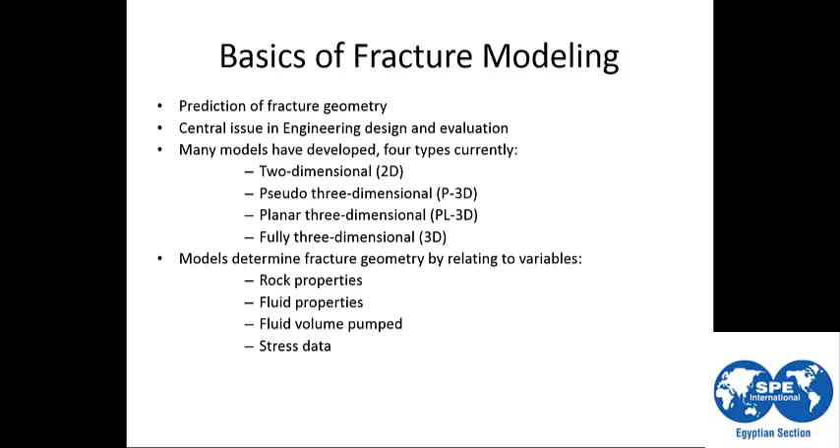First of all, we will discuss the fracturing model. 2D models assume the fracture. We have three parameters of control describing the fracture geometry: fracture width, fracture height, and fracture half length.

What do we mean by 2D model? 2D model means that you only have two parameters from the three parameters of the fracture geometry that can be changed, with the fracture half length. I mean that only one parameter cannot be changed. Here, the fracture height is constant, remaining constant, but the fracture width is changing with the fracture height.

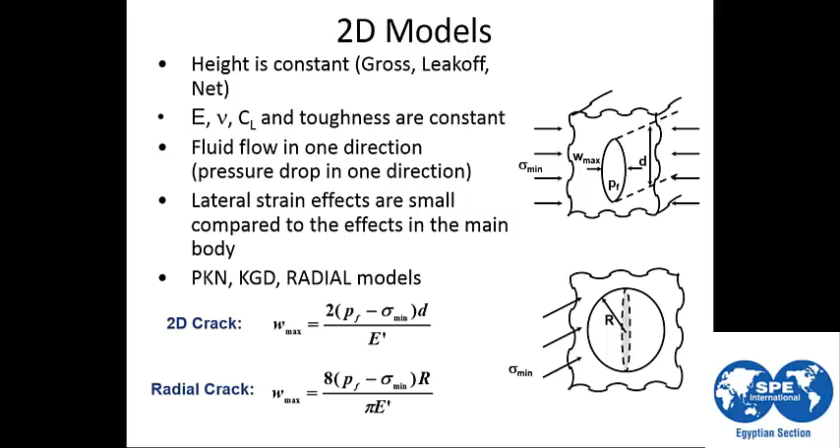Okay, so this is what we mean by the 2D models. We have in the 2D model three main types: the PKN model, KGD model, and radial model.

The PKN model, we can see from this geometry that the width is changing with the fracture height. However, the fracture height keeps constant with fracture half length.

For the KGD model, the assumption is the fracture width is kept constant, while it keeps constant with the fracture height, but it changes with the fracture half length. We can see from this shape that the fracture width is changing with the fracture length and keeps constant with the fracture height.

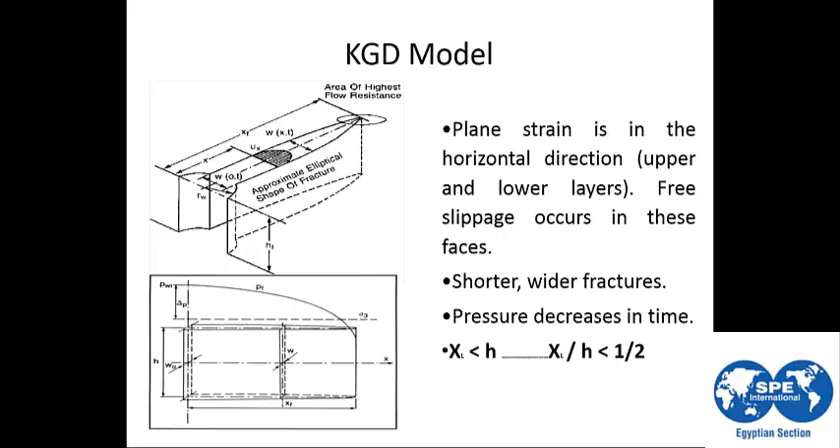For the radial model, we are assuming the model is like a sphere. The fracture width is changing with the fracture height and also with the fracture half length, but we assume the fracture half length is changing according to half sphere, like a radial in half sphere. So its fracture shape is kept constant according to this equation.

But we are not using the radial model so much. Mainly in the 2D models, we are using the PKN model or KGD.

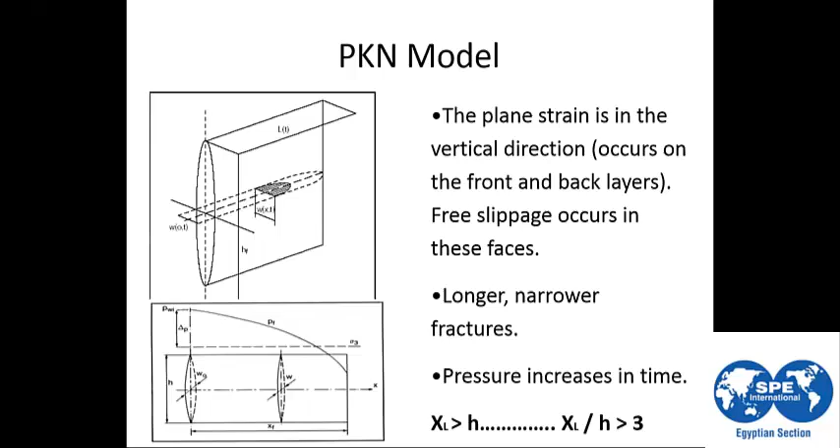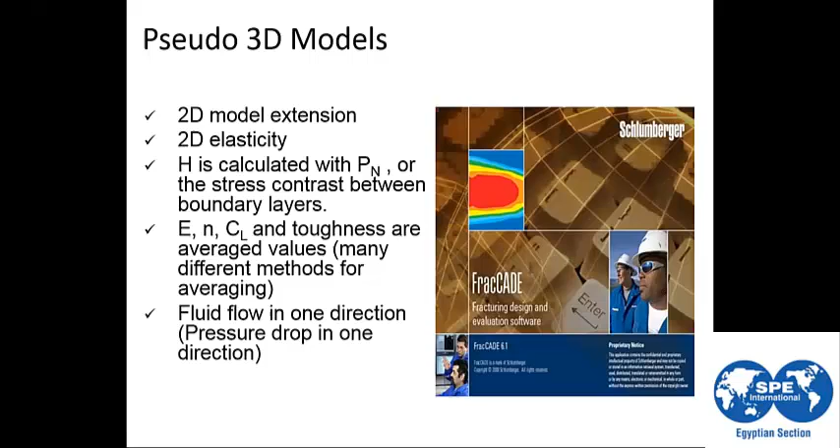However, the most used one is the pseudo 3D model that we use in most of our frac jobs. It divides the fracture into segments, and each segment has a different shape.

Here we assume that the fracture is divided into different parts. Each one of the parts has a different geometry, and this gives more reliability to the model, so it can explain the actual shape of the fracture. The P3D model is better than the 2D models.

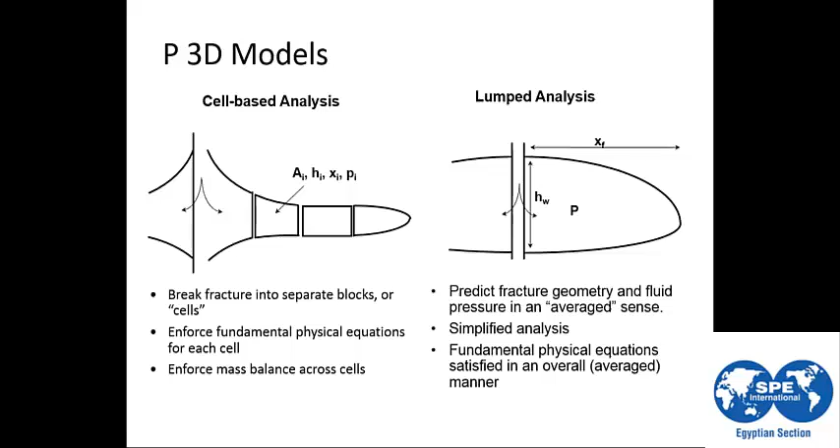However, the best one for sure is the full 3D model, which is similar to reservoir simulation. We divide the fracture itself into segments, small segments.

Each one of these segments, we can put all the parameters that we are using for the whole frac, which means that for each cube segment of the reservoir rock, we can assign its own Poisson ratio, its own Young's modulus, its own fluid leak-off coefficient, its own in-situ stress. All of these parameters can be classified into each single segment of this cube, as we can say.

So at the end, you will have fracture properties for each one of these segments. After combining the stress profile for each one, you will have different frac geometry inside each of these segments or cells. After combining the fracture results in each of these cells, you will have complete fracturing in all of them, and then you can combine these together to get the full frac geometry.

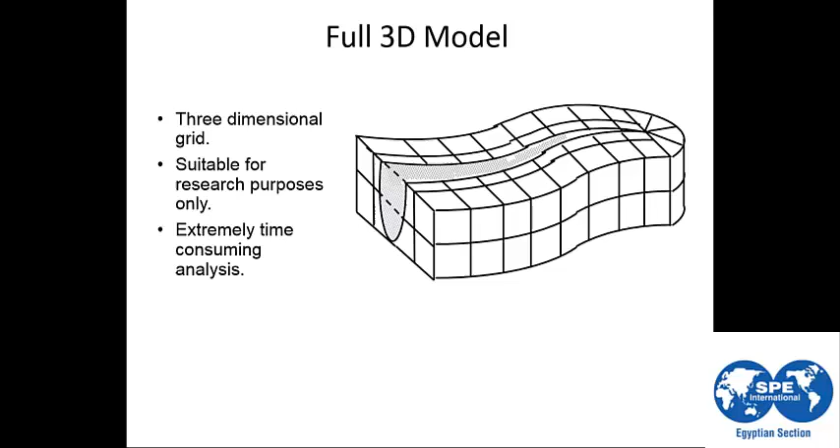Okay, we are now going to discuss the basic fracture calculation: how we calculate the net pressure, the closure pressure, and the near wellbore friction.

Equal the closure pressure plus the net pressure plus the near wellbore friction. So for this equation, it is clear and easy to calculate. The friction, the wellhead pressure, and the hydrostatic head are normal in our calculation as a petroleum engineer.

However, we are going to explain the near wellbore friction, which is divided into two terms: the tortuosity effect and perforation friction. So we have two terms: the tortuosity friction and the perforation friction.

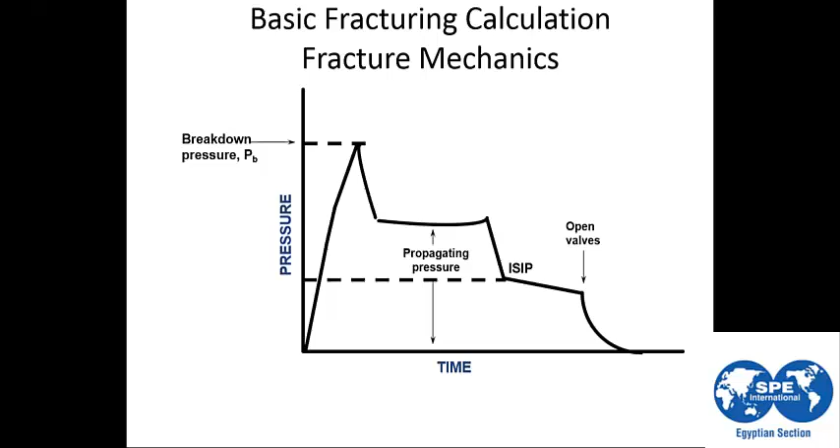What overcomes this force and keeps the frac open, we call the net pressure. The net pressure is controlling the width. As much as you apply more net pressure, you will gain more width of the frac.

So it is very important to design a frac job to calculate the closure pressure, to define what will be your required width and what will be the net pressure you are going to apply inside the frac, to calculate the bottom hole pressure. From calculating the bottom hole pressure, you will calculate the expected wellhead pressure by calculating the pumping rate and calculating the friction from the friction pressure equation.

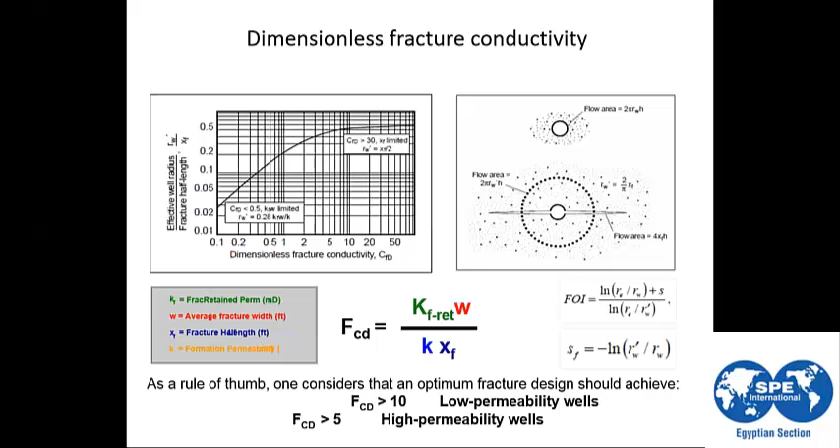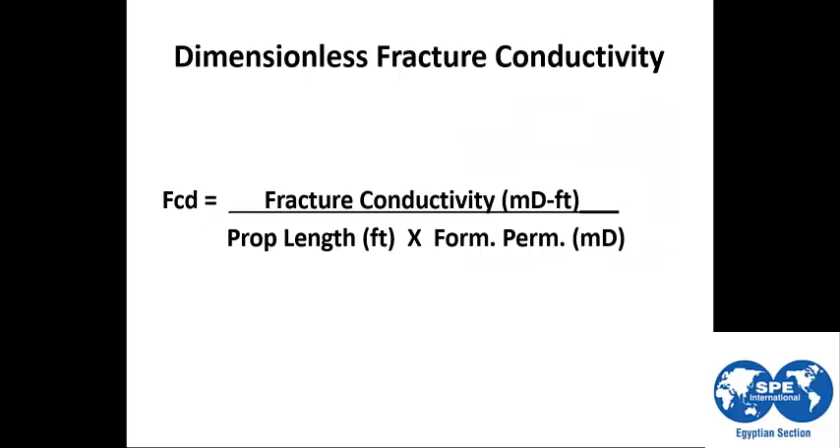We explained this already previously. Okay, so how we are going to select the fracture geometry and the required proppant and the proppant size, concentration, and everything.

First of all, we said that we define the required fracture width because the fracture width is affecting the dimensionless fracture conductivity. From the dimensionless fracture conductivity that you require, you will have your own selection for the fracture width. From the fracture width, you can get the fracture half length by the curve shown in the previous slide. So what is controlling the fracture width is the Young's modulus, the proppant concentration, and design of the treatment pressure itself.

As we said, the net pressure has an effect on the fracture width. The net pressure is controlled by what? It is controlled by the fluid efficiency. The fluid efficiency is affected by the pumping rate and the fluid viscosity. So all these terms are affecting the fracture width.

Also, the term retained frac conductivity depends on what? It depends on the closure stress, proppant type, proppant size, proppant concentration, and the fracture fluid damage that you are using.

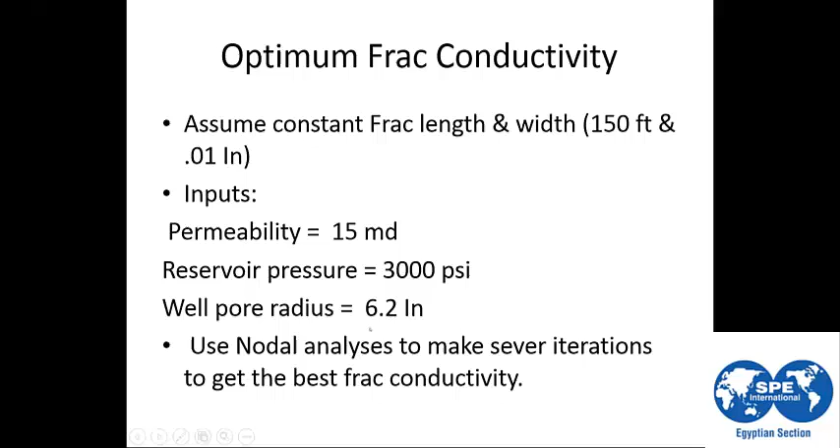To design optimum frac geometry, we give an example using nodal analysis to show the effect of each one of the parameters and select the optimum fracture geometry. We assume we have a constant frac half length of 150 feet and a constant frac width of 0.01 inch. We have a formation with permeability of 15 millidarcy, reservoir pressure of 3000 psi, and wellbore radius of 6.2 inch. By using the nodal analysis...

We did this sensitivity analysis assuming a constant fracture half length of 150 feet and constant width of 0.01 inch, and did a calculation sensitivity analysis assuming different fracture conductivity to see the effect of fracture conductivity and what is the optimum frac conductivity to select for this specific formation.

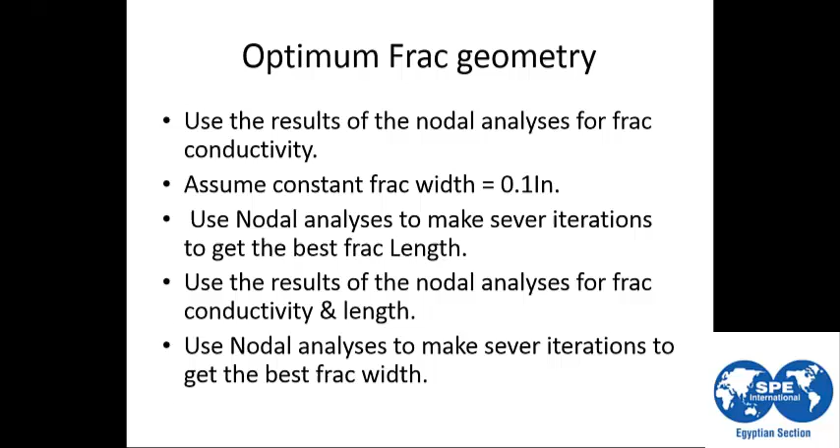Because each one of these permeability values, frac permeability, will be converted into an amount of money, because the proppant costs money. Also, pumping this proppant with the required frac fluid costs money. So the optimization here is selecting the optimum according to the production rate.

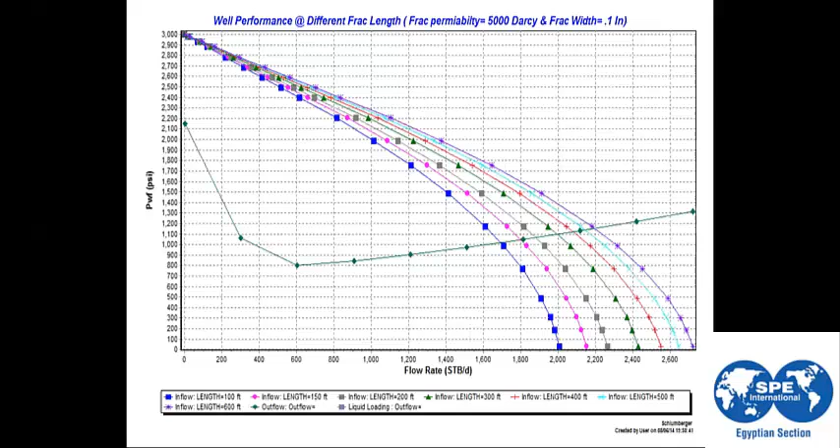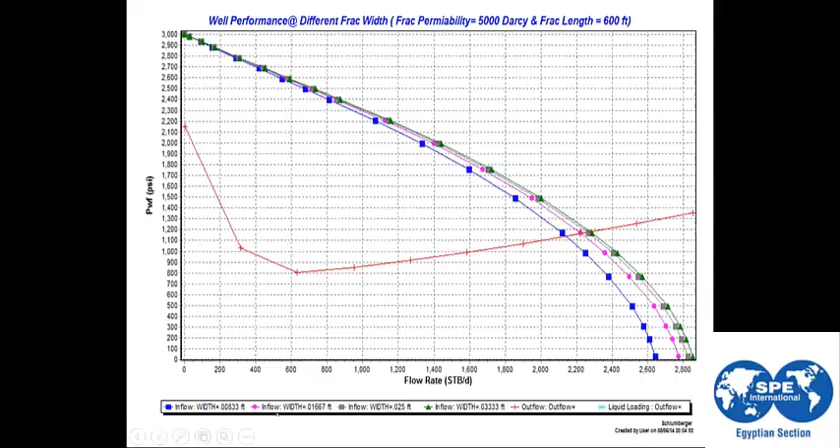Then we have to make the data collection. After we define our frac geometry, we should design the pumping schedule to achieve this required fracture geometry.

We have two different parameter types here: uncontrollable parameters and controllable parameters. Uncontrollable parameters include all parameters related to the reservoir rock properties itself: permeability, height, saturation, porosity, rock properties meaning Young's modulus and Poisson ratio, minimum stress, bottom hole pressure, bottom reservoir pressure, lithology and layer, and the type of reservoir fluid.

On the other hand, we have controllable parameters, which we use to design the frac itself: the string and wellhead configuration, downhole equipment, surface equipment, completion strategy, perforation strategy, spacing, and fracture material including the proppant and the fluid.

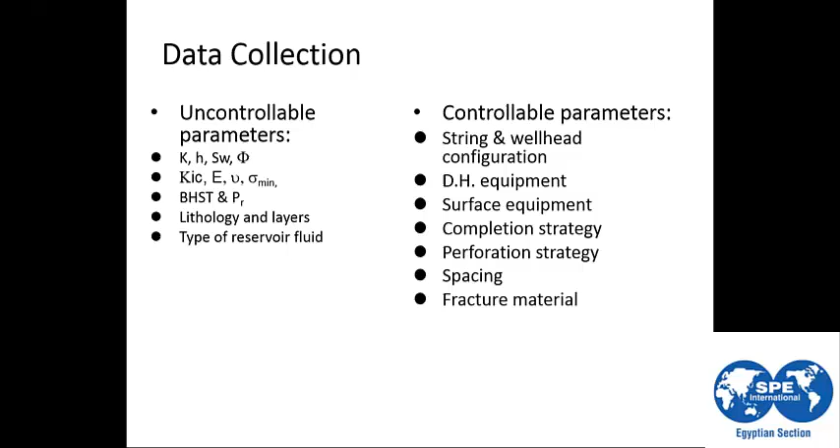We use these controllable parameters to control our geometry, meaning we control the fracture we are going to create by controlling the pumping flow rate, the fluid efficiency by controlling the fluid, and the frac conductivity by selecting the proppant properties. All of this can control the frac and get the required fracture conductivity.

Here is an example of the data we enter into the simulator to get the pumping schedule.

This is what we call the static earth model. It includes all the formations that the frac is going to deal with, each with its lithology, height, fracture gradient, Young's modulus, Poisson ratio, and toughness.

So we are laminating these formations above each other according to the lithology obtained from the ELAN and petrophysical parameters. Then for the same formation and distribution, we have the height, and we also enter porosity, reservoir pressure, gas saturation, oil saturation, and water saturation.

For the tubing, we use the OD and weight to get the ID of the tubing and its length, to calculate the friction and the rheology.

From the rheology parameters of the fracture fluid, we also input the casing data to get the ID of the casing. Also, the perforation data is very important to calculate the perforation friction.

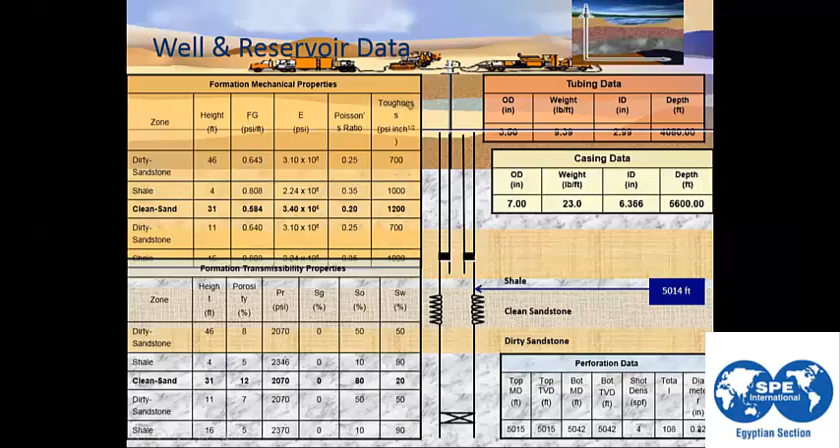So we add the perforation top and bottom in measured depth and true vertical depth, and the shot density per foot, to get the total number of shots, then the entrance diameter for the perforation itself to calculate the perforation friction as we said.

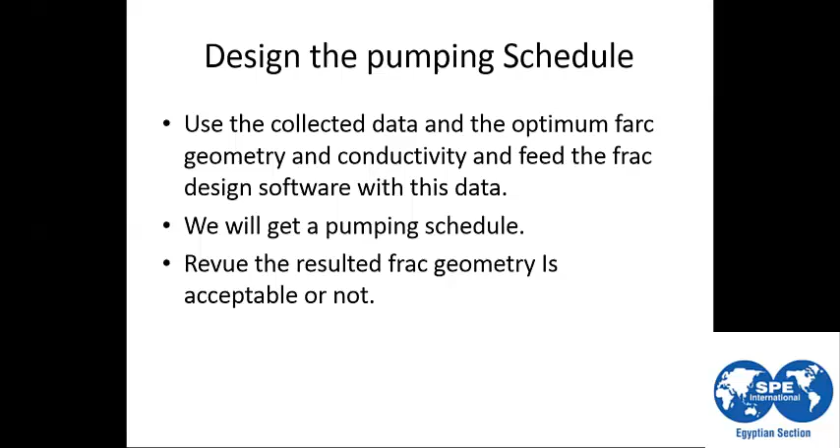So we use all this data as input for the software simulation to get the pumping schedule. This is an example of a pumping schedule.

The software works like this: you put in a pumping schedule first, then you can calculate the results of this pumping schedule in terms of fracture geometry and frac conductivity at the end.

So you should start by putting in a preliminary pumping schedule to estimate or predict the expected results of this schedule. If the results do not comply with our required fracture geometry, we can modify the pumping schedule to achieve the required fracture geometry.

So first of all, the first pump stage in the main frac is the pad. The pad is linear cross-linked gel without proppant, used to create or initiate the first fracturing. Then we start pumping the same fluid type with proppant concentration.

Here we start pumping proppant inside the newly created frac gradually, starting with 1 ppa, 2 ppa, 3 ppa, 5 ppa, 6 ppa, until the flushing.

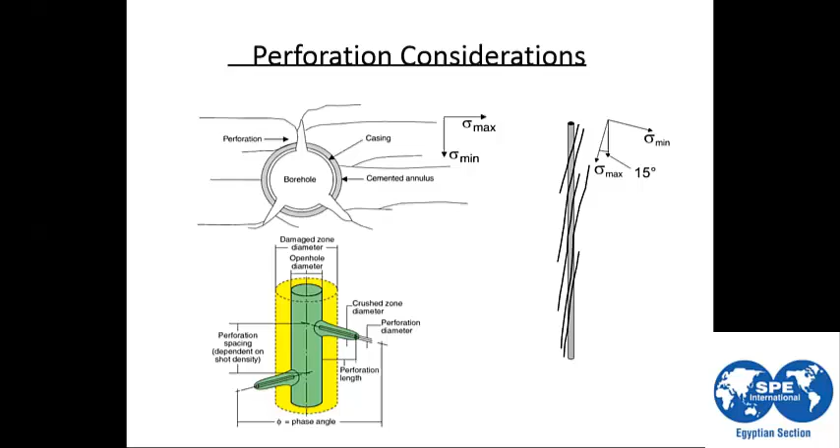So in order to reduce the tortuosity friction, we need to reduce the phasing between the shots during perforation. Also, to reduce perforation friction, we need to use big entrance holes or big hole perforation guns. This will increase the entrance hole diameter and decrease the perforation friction.

Also, for horizontal wells, we should select or design the orientation of the horizontal direction we are going to drill according to the required frac interception with the wellbore. If we see here, this is one multilateral well, the angle between this one and this one is 15 degrees. This frac, 1, 2, 3, 4, 5, 6, 7, 8, 9, all of them have the same direction.

This direction depends on the minimum stress direction, as we all agreed. So the interception between this hole and the frac will depend on your direction of drilling; you cannot control where the frac is going to propagate. It will propagate according to the minimum stress direction. So if you need to increase the contact area between the wellbore and the frac itself, you need to select this direction so the wellbore design is perpendicular to the minimum stress. Here, the well is drilled in the same direction as the minimum stress.

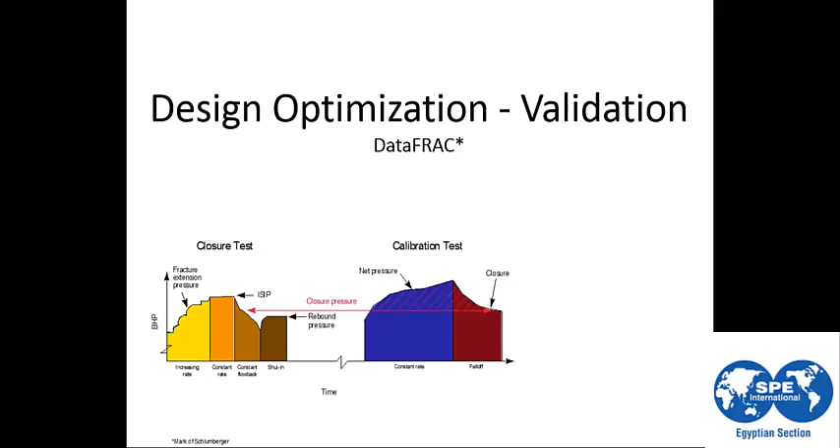With two neighbor wells, you will have totally different values for fluid efficiency, because one company is doing the data frac job with linear gel, and the other is doing it with cross-linked gel. So it is better to use cross-linked gel to get a fluid efficiency value equal to what you are going to face during the main frac job.

Here we are doing the step rate test and the calibration test. They mention we do the step rate test with linear gel, and the calibration test with cross-linked gel, because from the calibration test we are going to get the efficiency value. So it is required to get this efficiency value using the same fluid that you are going to use in the main frac.

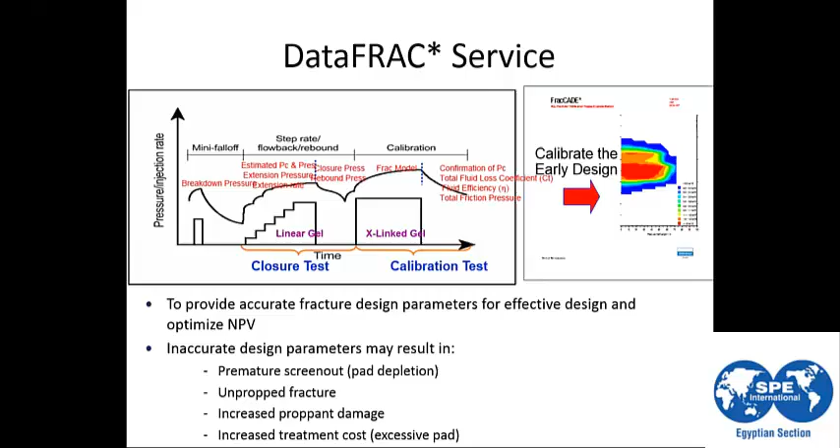However, with linear gel we will still get the pore friction value and closure pressure, and both of these are not related that much to the type of fluid.

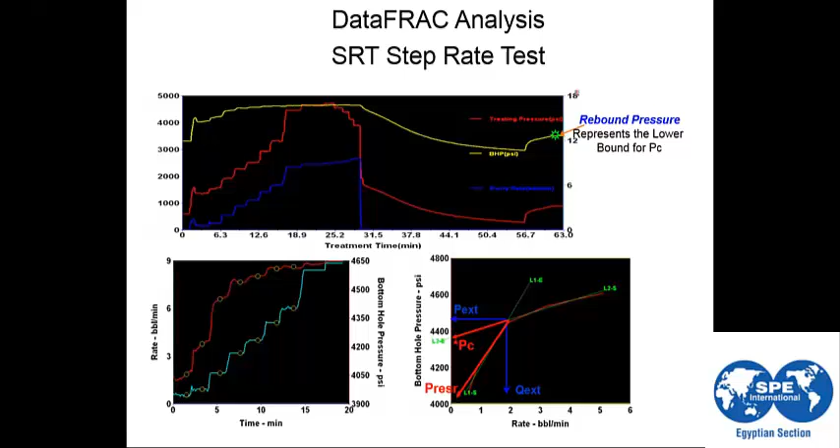The G function is calculated from what we call dimensionless time. This dimensionless time is T, which is the time in seconds from the initial shut-in pressure till the point of recording pressure.

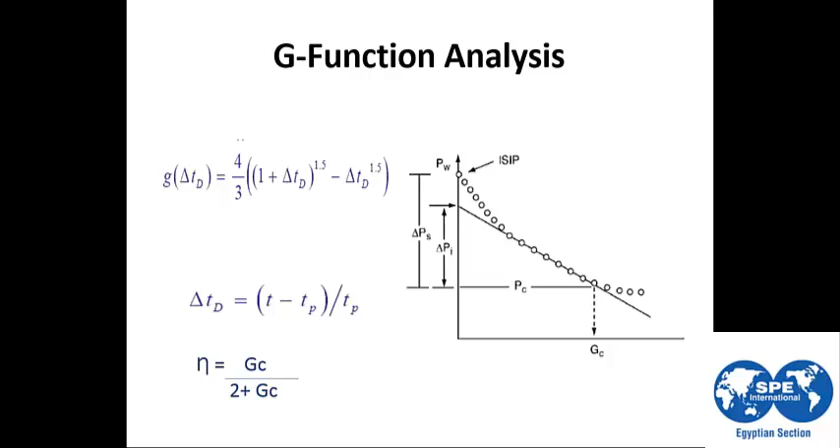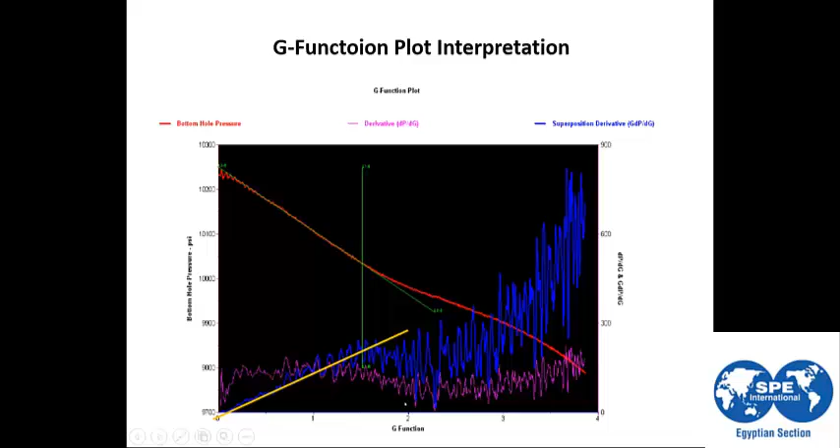So we draw all these three values for the pressure and its derivative against the G function. How we can calculate or identify the closure pressure point. Here, this is a typical G function analysis for a data frac job.

We depend on the superposition derivative to define the closure point. The closure point starts where the superposition derivative is almost linear, until the slope of the superposition derivative curve starts to increase dramatically. This point that we select as the closure point, then we can intercept the G function axis to get the G function value at this closure point, and then we can intercept the pressure axis to get the closure pressure.

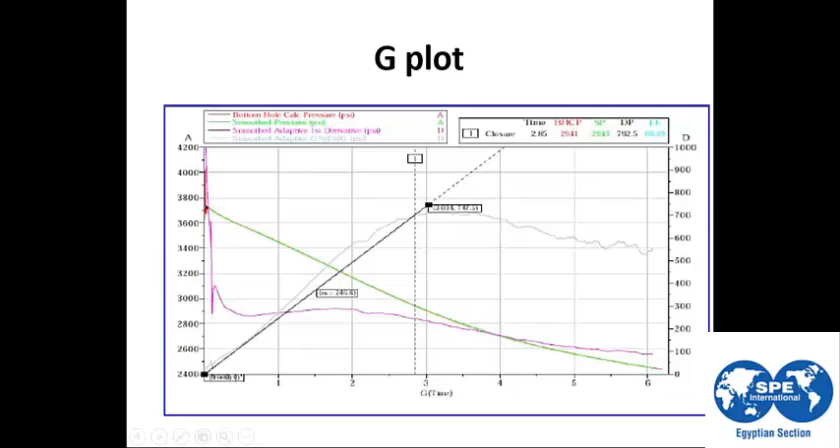We have here different typical graphs for the shape of the derivative and superposition derivative for different cases. In the normal or standard cases, the slope is kept constant until the point where the slope is changed, so we have this straight line. Once the slope of the superposition derivative starts to change, we select directly this point as the closure point.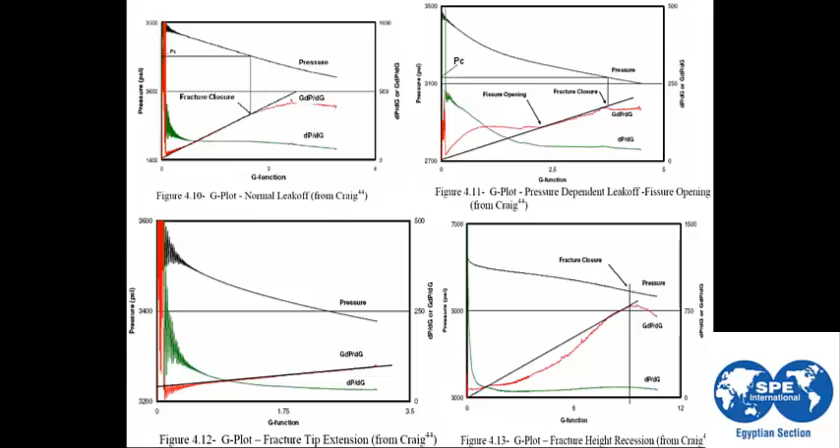There is another equation that we can use to calculate the fluid efficiency from the closure time. After you get the closure time, or the G function for the closure point, we can calculate the time of closure. Then we have the injection time, all in minutes. So we can apply this equation to get the fluid efficiency. This is called the Nolte equation to calculate the fluid efficiency.

Okay, I'm finished. Any questions?

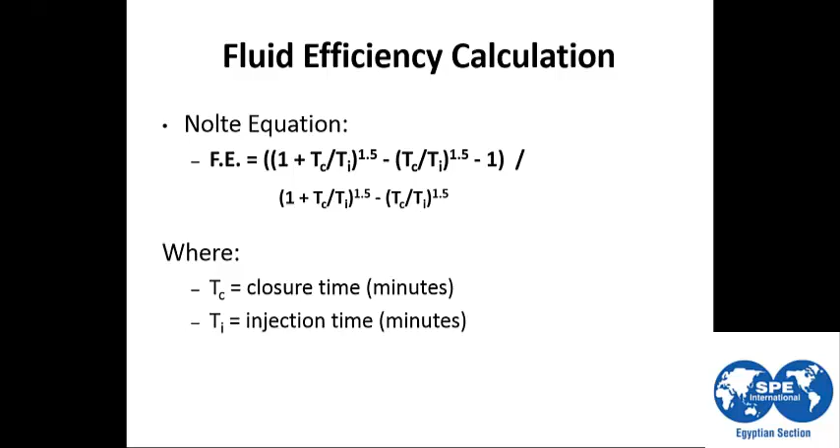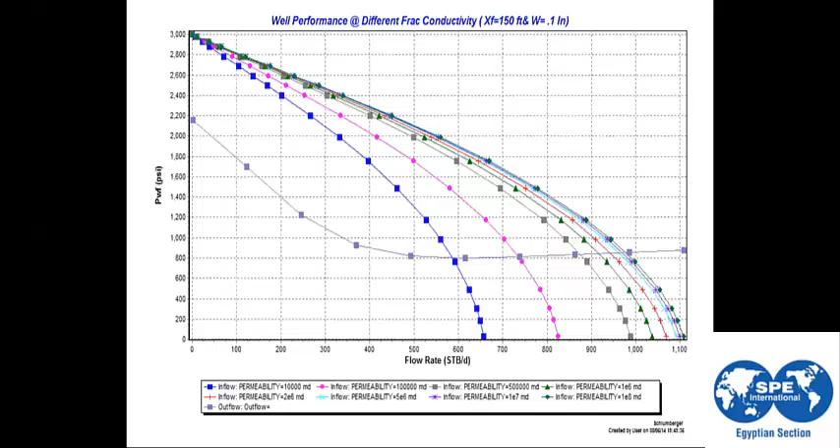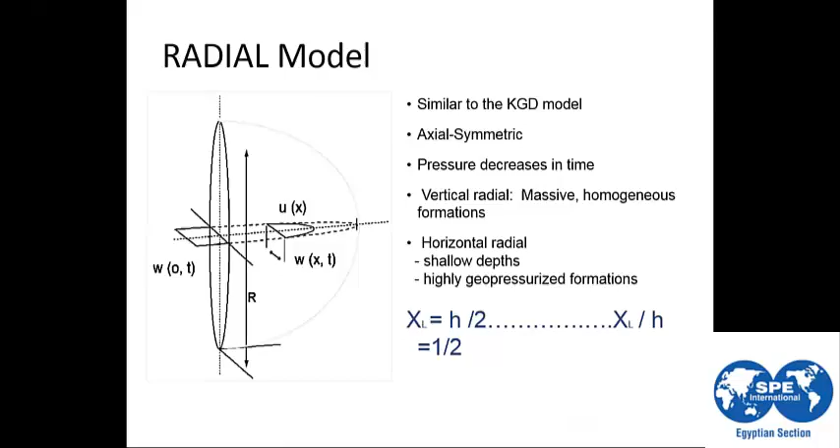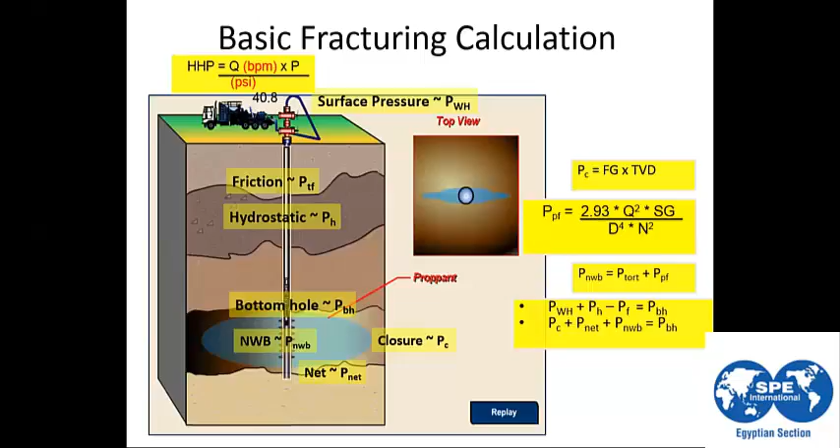As we said, for the fracturing of horizontal wells, you should take into consideration the direction of the minimum stress and the orientation between the frac and the well bore itself, to design the well direction before starting the drilling process itself. So you should orient where you are going to drill to have the point of interception between them. I'm trying to get the slide.

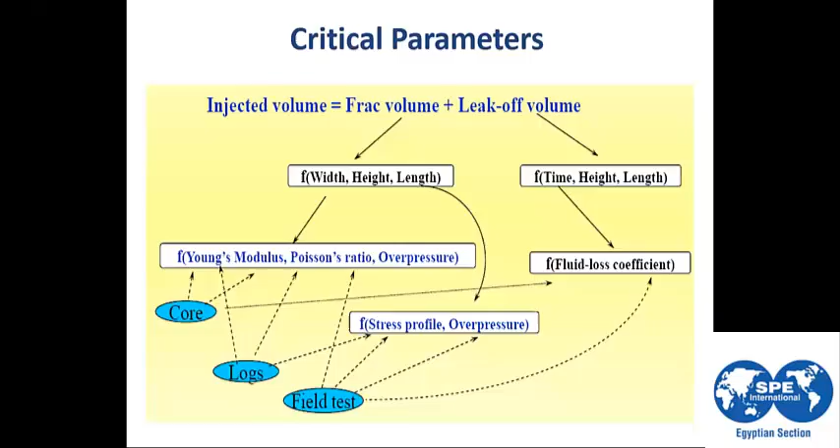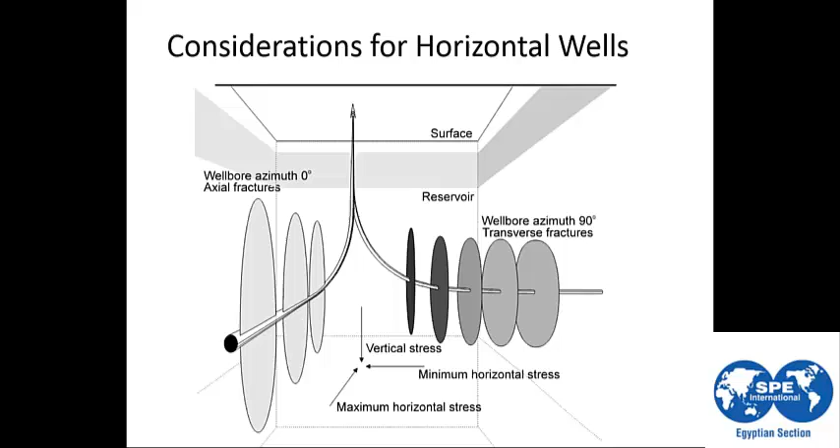Another question: how do we determine the ratio between the clean and the dirty fluid? As I explained, the clean fluid is the total volume... you mean this percentage, yes, here, this percentage of the pad. So we have total stage volume clean volume, and total stages volume dirty volume.

The difference between dirty and clean: the clean is total liquid pumped without proppant, and the dirty volume is the total fluid pumped in addition to the proppant volume. So usually the dirty volume is bigger than the clean volume.

So we take the pad volume and divide it by the total job volume, once using the clean volume and once using the dirty volume, giving us two different percentages. However, the pad volume is constant in terms of dirty and clean because there is no proppant in the pad. So since the clean volume is smaller than the dirty volume, the percentage of the pad from the clean volume will be higher than from the dirty volume, because the dirty volume is bigger.